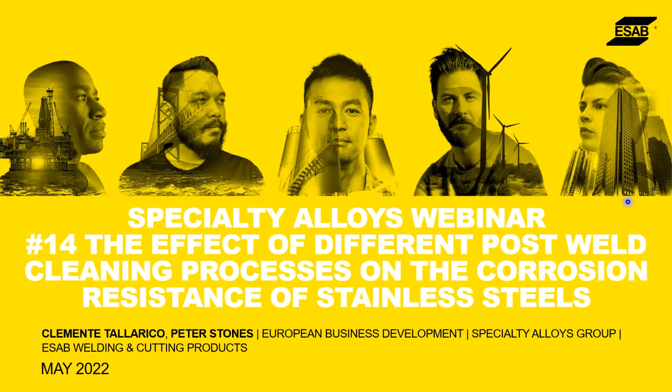So the topic I want to talk about is cleaning processes, basically, and what happens to stainless steel. So we'll start off really with where does stainless steel come from? Who invented it and when? And obviously it's very important to understand what makes a stainless steel stainless. So what is it? What are the properties that stainless steels have that make them stainless?

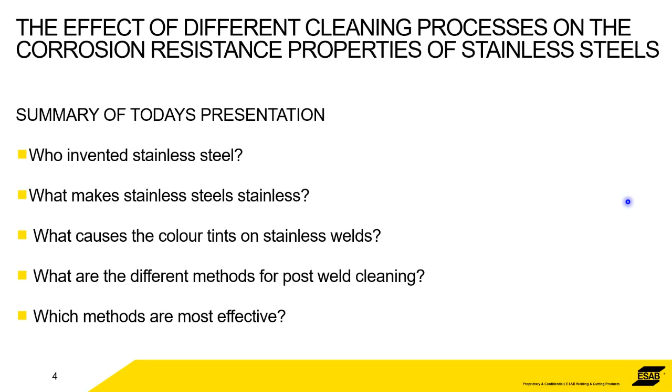So talking about things like colour tints. Colour tints are very relevant to anybody that's doing any kind of welding on stainless steel. And then we'll talk about the different methods for cleaning and the effectiveness of each of those. So what would we recommend as being the best method to get the best results in terms of appearance and corrosion resistance? So who invented stainless steel?

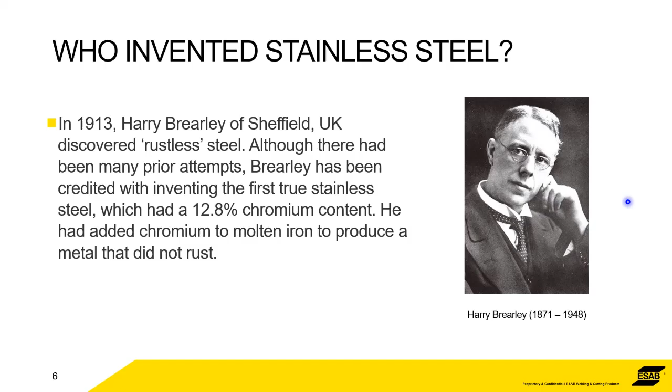So he actually put chromium into molten iron, and the effect was that this 12.8% chromium content, when it was left out in the rain, it didn't rust. So way back in 1913 is when all of this started. So what is it about this 12% chromium in the steel that makes it stainless? Well, because there's almost like an excess of chromium in there.

You've got more than 12% in the base metal, and the surface of that will react with air, and the oxygen in it will turn chromium into chromium oxide. Chromium oxide is very inert. It's very passive, and it's very corrosion resistant. So if you have a layer of chromium oxide over a base metal, then it will stop it from rusting. It will stop any kind of corrosion from happening.

The problem is when the chromium oxide layer is removed and there's no oxygen for whatever reason. If it's submerged in some kind of liquid, if there's no oxygen, then you can't get the chromium oxide, so you don't get the corrosion resistance. It's the chromium oxide that causes the corrosion resistance.

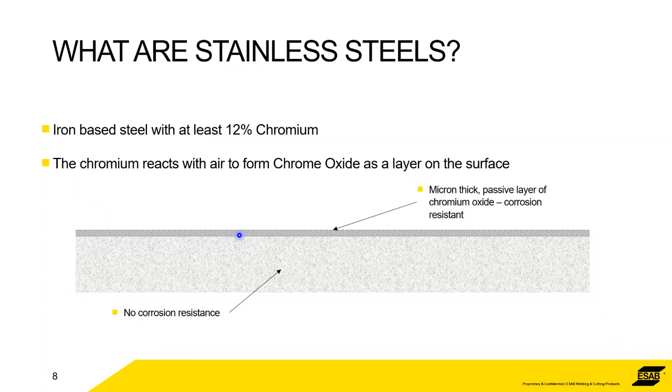So typical surface defects that will contribute to damaging this chromium oxide layer and making the stainless less corrosion resistant. Things like heat tint and oxide. It's not just the appearance. High temperature causes oxidation of the base metal, and you get a thicker chromium oxide layer, and it's the light interference through the thicker layers of chromium oxide that causes the tint. I've got a separate slide on that, so I'll talk more in detail about that later.

Any kind of weld defects like pores, slag inclusions, weld spatter, arc strikes, any of those kind of things, then you're sure to have damaged that chromium oxide layer.

It's a mechanical abrasion that's got rid of that chromium oxide layer. If the chromium oxide layer is gone, then you don't get corrosion resistance. If it's in air, then it will reform. Okay, but if you do have bumps and knocks on the surface, then it's an area where dirt and dust can accumulate, and that's another problem we'll talk about later again.

So iron contaminations, things like from machining, especially grinding. If you're grinding and you leave grinding dust on the surface of stainless steel, then the moisture in the air will attack that and cause that to rust. So that will decay, and again that decay will take away the chromium oxide layer. So everything revolves around this chromium oxide layer.

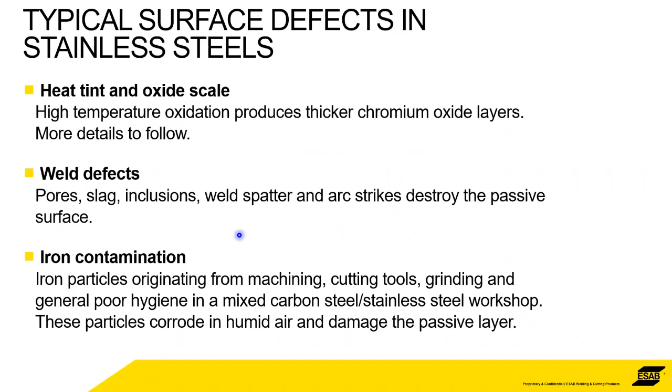Surface, I've mentioned this before, so uneven weld beads, grinding marks, these collect deposits, these accumulate rubbish, dirt, whatever, dust, and so it obviously increases the risk of corrosion, and you get product contamination.

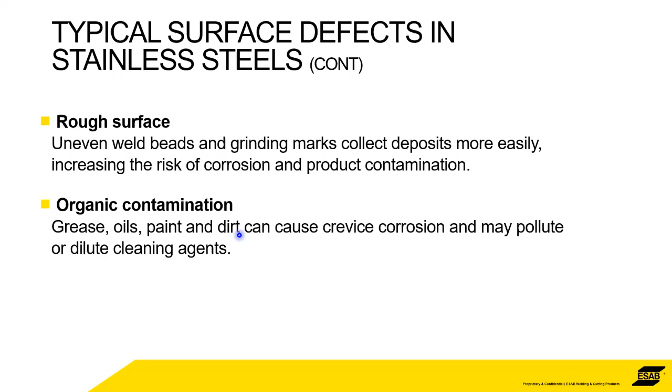And then organic contamination, such as oils, greases, if you've got some machining oils, greases from assembly, paint as well. These can cause crevice corrosion, so it can hold moisture underneath the surface, and you get an actual crevice corrosion decay. And one of the other things about maybe thick layers of paint is that if you're going to do some kind of chemical cleaning, then it will pollute and dilute the cleaning agent. So you're not getting your true value from your cleaning agents. They're going to get diluted.

So heat tint, we'll talk specifically about heat tint. So I mentioned it before that it occurs when you get the chromium-rich chromium oxides on the surface, and as you heat up the base material, so we're talking the heat affected zone that gets to very high temperatures. The higher the temperature causes the chrome to get drawn to the surface and come out as chromium oxide, and it gets thicker and thicker, and the thicker the layers, then the darker the tint is.

The one thing that has to be taken into consideration is that obviously all this chrome's appearing on the surface, and it's not for nothing. The chrome's coming out of the base material. So if you have chromium-rich layers because of the excessive heat tint, the darker the heat tint, the thicker the layers, the base metal immediately underneath that is depleted of chrome by definition. The chrome has to come from somewhere, so it comes from the base metal.

So in order to restore the properties of the stainless steel, not only do you have to get rid of this chromium-rich heat tint, but you also have to get rid of the chromium depleted layer underneath. And again, we're not talking millimeters thick, we're talking microns. But you have to get rid of that chromium depleted layer underneath, because that's vulnerable. That doesn't have the same corrosion resistance as the proper grade of base material stainless steel.

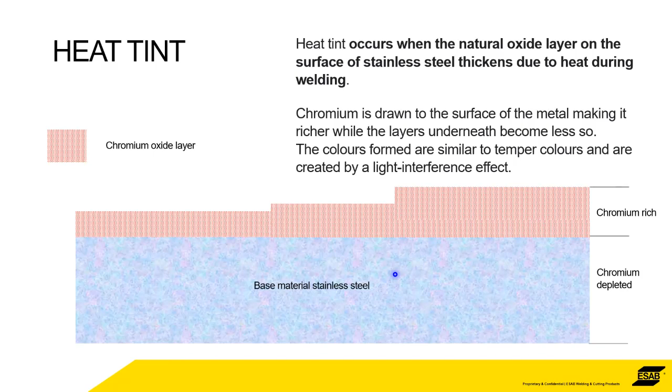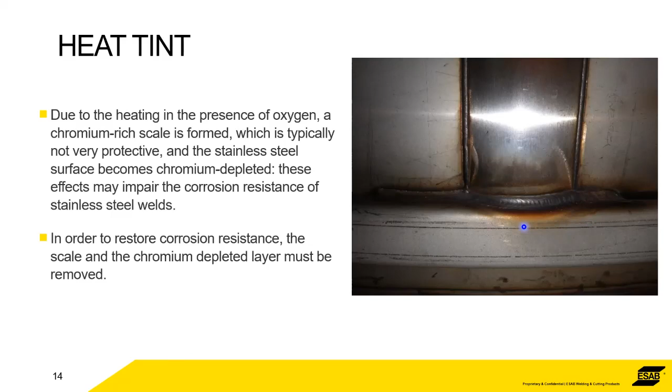So in order to restore corrosion resistance, you've got to get rid of the heat tint, the chromium oxide layer, and you've got to get rid of the chromium depleted layer underneath. I'm sorry I'm repeating myself, but it's obviously quite important.

Obviously, chromium oxide needs oxygen to form. So if you can purge the area that's getting hot, this is obviously the inside of a pipe, but it's a good illustration. If you can purge the inside of a pipe to get rid of the oxygen, then the heat tint won't form. From number 1 at this side, you can see this is 10 parts per million of oxygen, and there's no heat tint, nothing's formed.

So the chromium's not been able to react with oxygen and form oxides. Over at the other end of the scale, we've got 25,000 parts per million of oxygen, and you've got a very, very distinct heat tint there. So purging will minimize the formation of the heat tint.

What you need to know is just because you haven't got a heat tint, like in number 1, doesn't mean you haven't got a chrome depleted layer. The heat has still gone into the stainless steel, and it's caused the chrome to move. Basically, it's caused the chrome to migrate to the surface. So you still have a chromium depleted layer. You just can't see it. Okay.

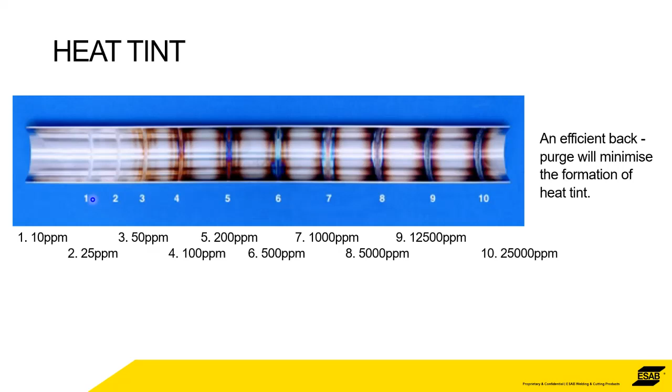So obviously, heat tint is affected by a number of factors, several of which are listed here. Obviously, steel composition. The higher the chromium content, generally, the more heat resistant the steel is, and so the heat tint colours are delayed. It sounds quite contrary, really, that you've got more chrome in the base metal and you're going to get less heat tint. But it's really the more chromium in there, the more heat resistant the steel is. So the colours become delayed.

Atmosphere obviously helps. So oxygen rich means you're going to get heat tint. Exposure time causes the colours to deepen. So multi-pass welds, where the heat affected zone is repeatedly being heated up, will deepen the colours. And it gives the appearance that a higher temperature has been used, so it can catch you out maybe. And surface finish, so the rougher surfaces oxidize at a higher rate.

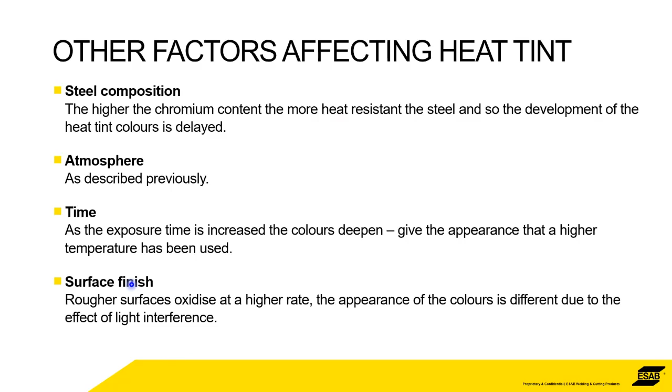So what you can see is light interference, shining through the chromium oxide. So it's very similar to temper colours in steels. The same kind of idea. So the cleaner the surface, the smoother the surface, the better it will be.

So in terms of the cleaning methods, oh, here we go, an announcement, excuse me.

The most common one probably that's used everywhere is pickling. Obviously, there are problems associated with pickling because it's a fairly strong acid. We've said there it will remove the oxides and the chrome depleted zone, but it'll also remove iron contamination.

Didn't specifically mention it, but things like grinding dust, sparks, they're again very hot. Sparks will take away the chrome oxide layer on top of the base metal. And also they're traveling at great speed, so you've a high possibility of embedding slivers of metal into the surface. So the iron can actually be embedded into the surface, and something like pickling will actually get rid of that. That's why it's so good and so effective.

Obviously, it's dependent on the steel grade, the concentration of the pickling media that you're using, but temperature and the thickness of the oxide layer, they all have an effect, but they can all be compensated for. Pickling products, paste and gel are the usual ones. You see these kind of applicators, just brush it on to the affected areas. But depending on the size of the piece that you have, you may even have a pickling bath.

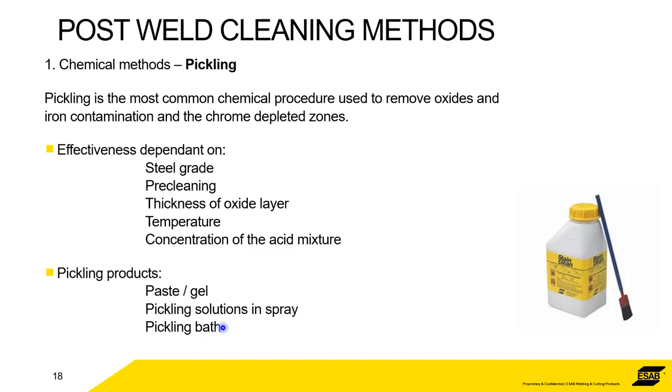Next, most common application really is passivation. So it's a mild oxidant, like a nitric acid. This encourages the growth of chromium oxide. What you're trying to do is to restore the chromium oxide. So air is obviously the natural primary passivation media for stainless steel.

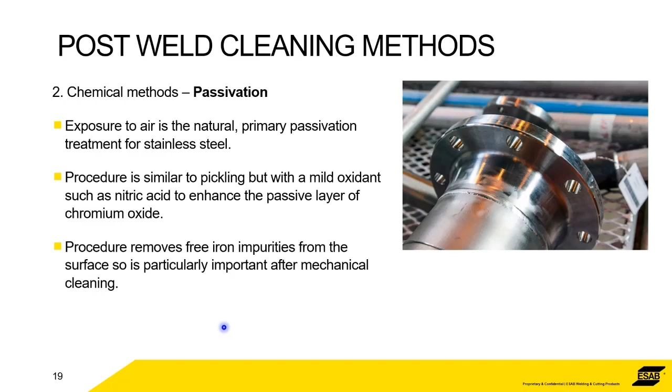But if you treat it with this mild nitric acid, HNO3, there's oxygen in there, and that will encourage, if you like, the chrome to form chromium oxide on the surface. It's acid, so it will remove the iron from the surface. So yeah, it's more common to be used after some kind of mechanical cleaning.

Electropolishing doesn't selectively choose the areas of the heat affected zone. It doesn't selectively choose the chromium oxides to attack, or the chrome depleted layer. It doesn't select those two, it attacks everything. So it's obviously electro by definition. Again, it's a voltage and a current.

You're setting up a potential difference across there within a media, an electrolyte, I should say, and that removes the surface, microtips, from the whole surface of the part that's being treated. So it's an electropolishing of everything. So it'll polish the unwelded areas just as much as it will polish the welded areas, the weld beads, the heat affected zones. It treats everything the same.

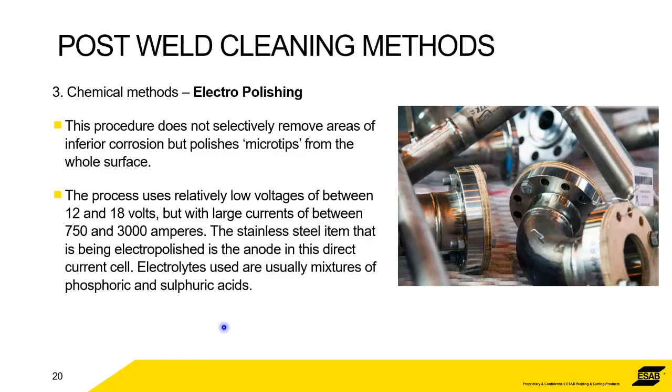Mechanical post-weld cleaning: not surprisingly, we see grinding and polishing, and the way to attack it really is to start off removing what you need to, basically, but then polish it up so that you don't leave a rough finish. The smoother the finish that you can leave, the better it will be. It gives more of a chance of the stainless forming this passive chromium oxide layer, and it looks better. The appearance is obviously a lot better.

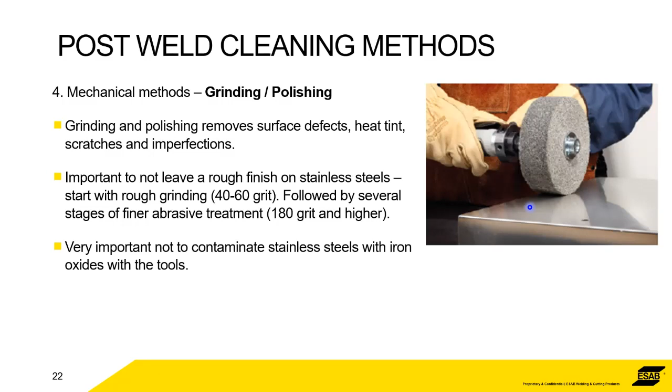We say gradually increase the grit number. So start off with a 40 to 60 when you're polishing, and then 180 and above, 360 even, to get a very high polish on there. Makes a big difference. And obviously, we say it again, it's very important that you mustn't contaminate the tools that you've been using on carbon steel. You mustn't use them on stainless steel afterwards. All you will do is embed iron into the surface of the stainless, so it'll completely get rid of this chromium oxide layer. Again, I keep going on about the chromium oxide layer, but that's what's important.

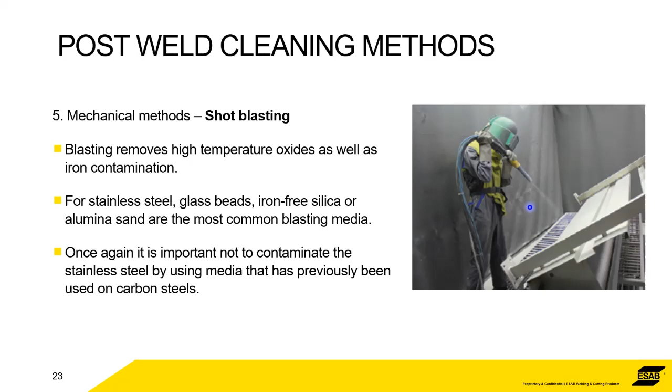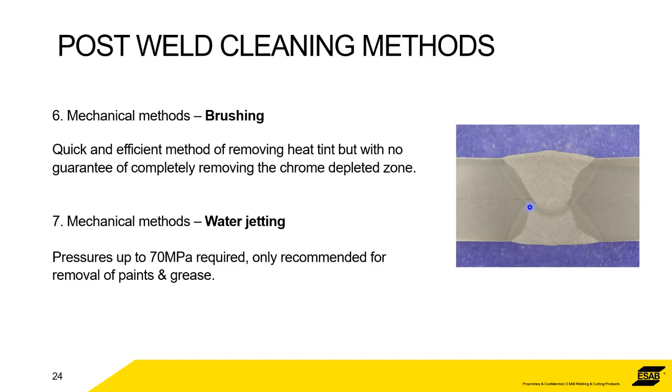Brushing, obviously, people brush. You can quite successfully get rid of the heat tint by brushing, and you can see what you've done, so that looks good. However, you can't really guarantee that you're going to get rid of everything, and you certainly won't know that you've got rid of the chrome depleted zone. So it's a good first start, if you like. Water jetting is used occasionally, but really that's just for paints and greases. But it is a mechanical method that some people use, so I've put it on the list.

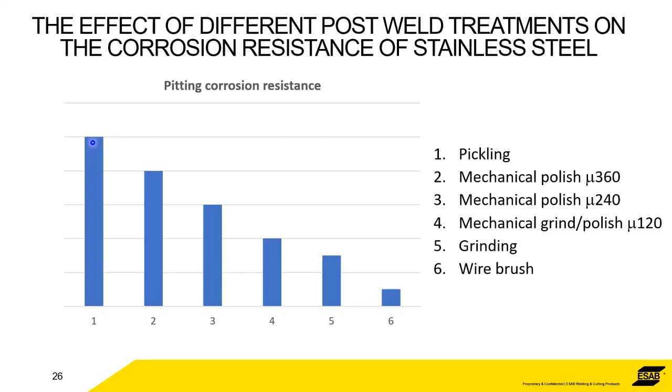When you start to polish, you can see the difference between the various grit sizes from 120 up to 360. So at 360, you've got twice the pitting corrosion resistance, so it's twice as good. The effect of doing a polish with a grit of 360 is twice as good as doing a grind and polish at 120 grit. And then the best of all that we recommend would be pickling. That's going to give you the best results. It's going to return basically the properties of the base metal.

So in conclusion, it's key that it's not just the heat tint that's removed. You have to remove the chrome depleted layer. That's a little bit surprising and a little bit more difficult, maybe. Chemical pickling is the best because it preferentially grabs hold of the chrome depleted layer, and it grabs hold of the chrome oxides, so it will dissolve those regions. It's very controllable. It's relatively cheap. So it's absolutely what we would recommend.

Mechanical methods, yeah, fine, absolutely, if that's all that you can do. But you do have the risk of embedding particles in the surface, so you have to be sure that it's nice and clean once you've finished doing any kind of mechanical grinding, polishing, machining. They're all risk points for actually damaging the surface and damaging the chrome oxide layer. So providing you can restore the chrome oxide layer, then this is fine. You can do that by leaving it in air, or by passivation, for example.

But for optimum corrosion resistance, the absolute best that you could possibly do is a mechanical clean and polish, followed by pickling. So if you do both, then you're absolutely covered, and you're returning the material back to its original state.